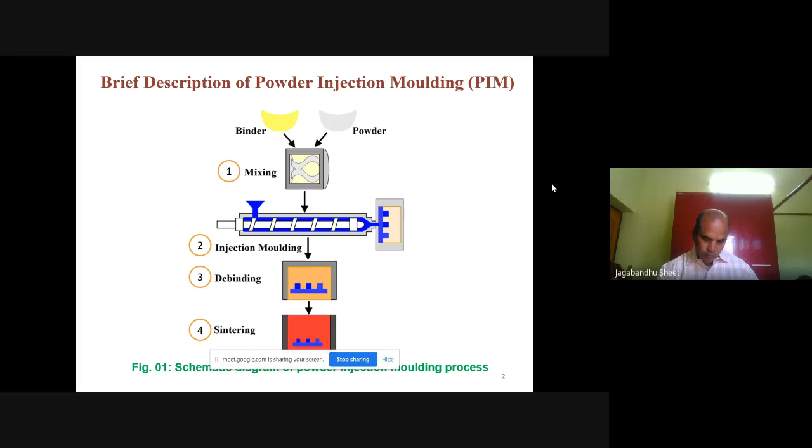For a brief description of powder injection molding, we can see a schematic diagram with 4 stages: first mixing, second injection, third debinding, and fourth sintering. In the mixing stage, powder and binders are mixed together, forming a feedstock, which is fed into an injection molding machine to give it shape. The compact is then sent for debinding, where the binder is removed, and then it goes to sintering, where particles are joined to give strength to the component. Micro powder injection molding is just a miniaturized form of conventional powder injection molding.

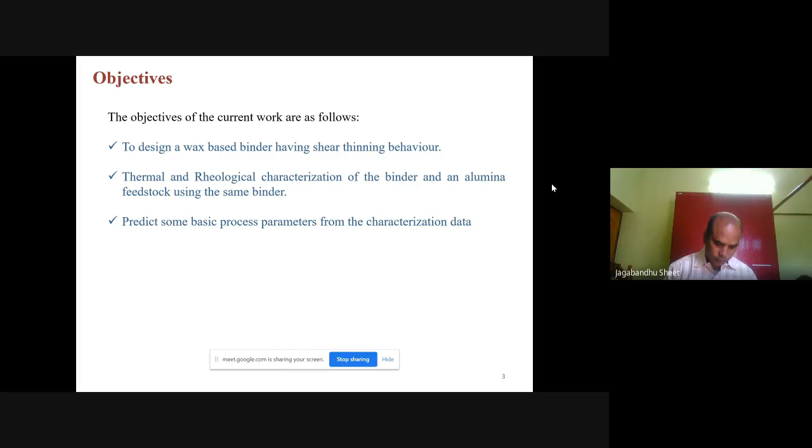The objectives of the current work are as follows: to design a wax-based binder having shear thinning behavior, then thermal and rheological characterization of the binder and an alumina feedstock using the same binder, and to predict some basic process parameters from the characterization data.

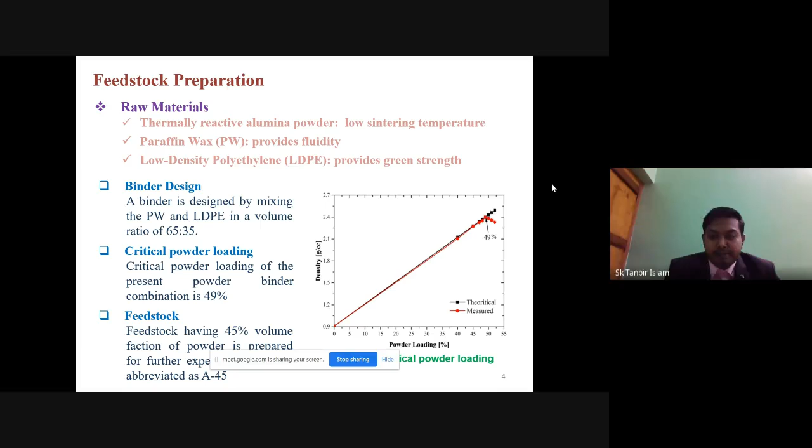TG analysis: here, loss of weight is recorded with increasing temperature, and we found that at 193 degrees centigrade the feedstock starts degrading, and above 478 degrees centigrade there is no further change in weight loss, meaning there are no binders present in that feedstock left to degrade.

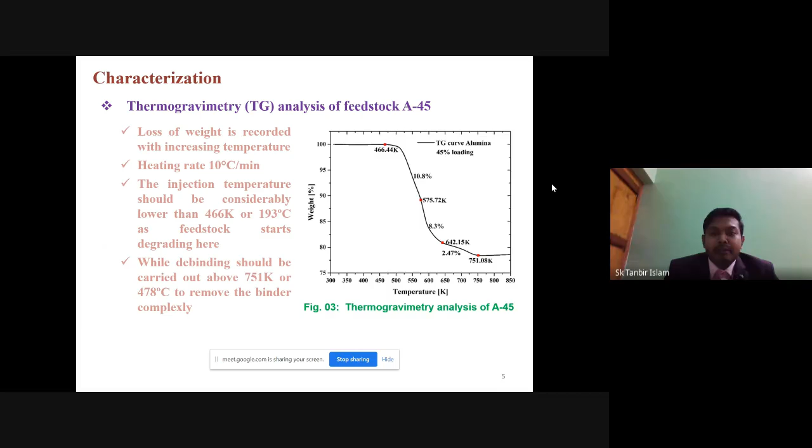DSC analysis: from this we can find the melting and solidification points of the binder and feedstock as well. From this DSC analysis we can calculate the specific heat and latent heat of solidification, as solidification is more important than melting for our binder. Here we have calculated these values.

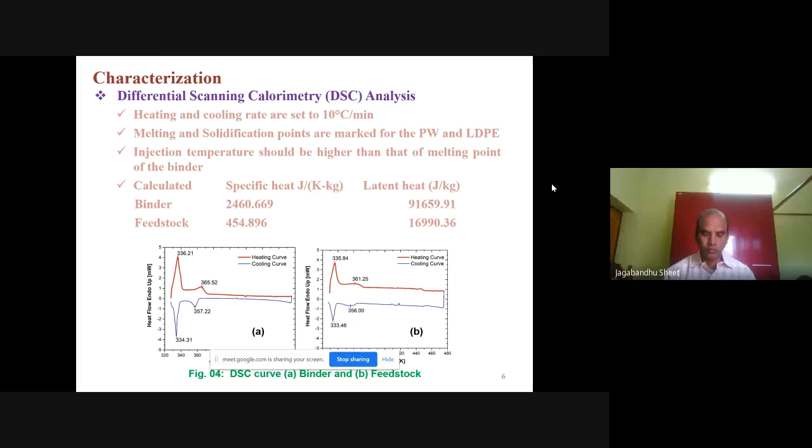Thermal conductivity measurement: in this process we have used the flash light source method to measure the thermal conductivity of the binder over a wide range of temperatures. During our injection, the temperature falls from higher to lower, so we measured it in that way.

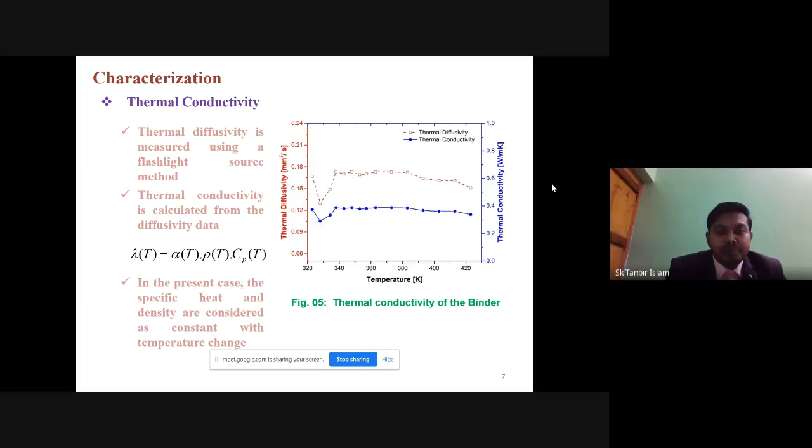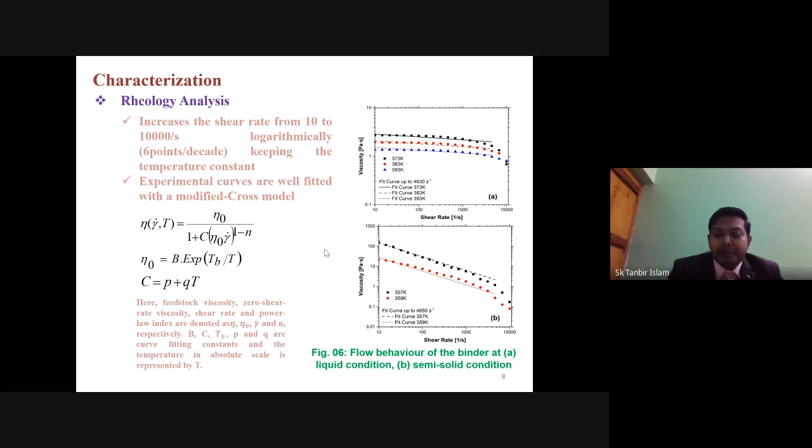Rheology analysis shows us the flow behavior of the material, and here we analyze the flow behavior of the binder as well as the feedstock. Two graphs are presented for the binder at two different temperature levels: the first is at higher temperature where the binder is completely liquid, and the second is at a temperature where one of the binder ingredients starts to solidify. We have used a modified Cross model to fit these graphs, and from these two graphs we can see these show shear thinning behavior - with increasing shear rate, viscosity is dropping.

Similar kind of experiment has been carried out for the feedstock, and we found here also a shear thinning behavior, which is favorable for injection molding process. Using the modified Cross model we used earlier, we found a power law index for liquid binder is 0.91, semi-solid binder is 0.32, and for our feedstock it is 0.43.

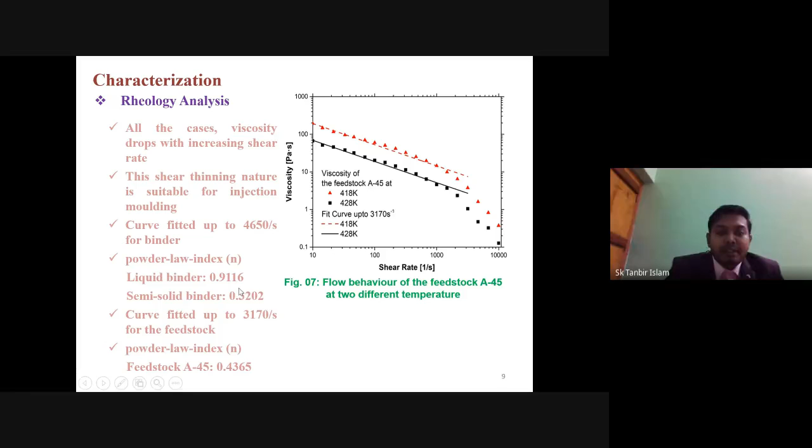It is found that there is a significant difference between liquid binder and solid binder, semi-solid binder, which means that semi-solid binder is highly dependent on shear.

Microchannel out of alumina: we prepared an alumina feedstock and injected it into a die where microchannels are made. We have two samples, one injected and the second one sintered. The component is debound at 500 degrees centigrade and sintered at 1540 degrees centigrade for 30 minutes, and we achieved 97% density of the alumina.

This component could be used for cooling purpose in small devices.

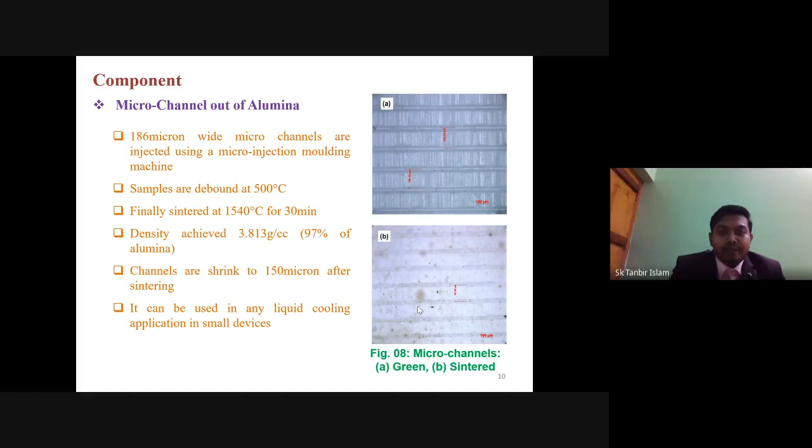Conclusion of our work: TG and DSC analysis suggested that the injection temperature should be between 92 degrees centigrade and 193 degrees centigrade, and the wax-based binder system provides shear thinning behavior to the feedstock. A modified cross model fits the rheology data. Data like latent heat and specific heat obtained from DSC analysis, and flow behavior of the binder and feedstock, could be used to simulate the injection stage in future work.

The applicability of the feedstock A-45 in micro powder injection molding is experimentally validated by developing microchannels through injection molding and subsequent debinding and sintering.

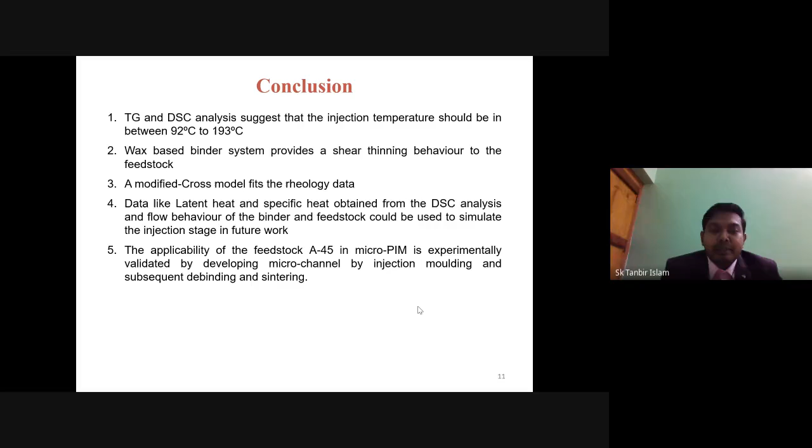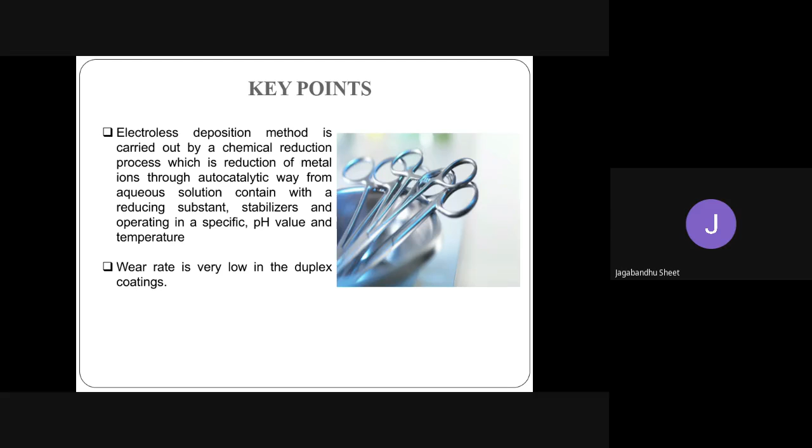The electroless deposition method is carried out by a chemical reduction process, which is reduction of metal ions through autocatalytic reaction from aqueous solutions containing the reducing substance and stabilizers, and the pH value and temperature have to be maintained according to the coating deposition time. And the electroless deposition coating, like the duplex coating, has a very low wear rate here.

The electroless deposition method has become more popular for industrial applications due to excellent tribological, electrical, mechanical and physical properties. And this is applied in the whole range of industry, or in daily use equipment; in a very simple example, in our almirah it is also used. Producing homogeneous coating with electroless deposition is possible, and it also exhibits high quality adhesion on different substrate materials. The electroless process allows producing very uniform homogeneous coatings.

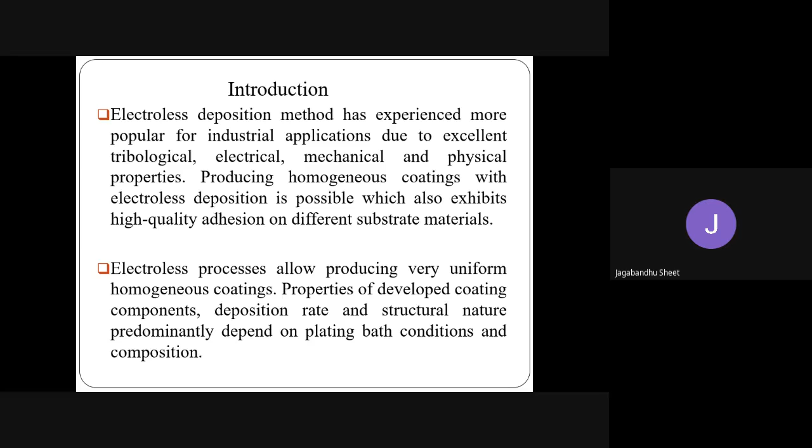The properties of developed coating components, deposition rate and structural nature predominantly depend on plating bath conditions and compositions also. And to increase the corrosion resistance, alloying elements like zinc, molybdenum, copper, etc. are added to the electroless NiP and NiB coating. That is, different types of nickel phosphorus as well as nickel boron coatings can include this type of components. And a few researchers are not fully convinced with the progress of corrosion resistance of the deposition coatings here.

For this, considerable attention has been paid to duplex coating, that is Ni-P as the inner layer and Ni-B as the outer layer coating, as well as multi-layer coating deposition. That means not just duplex coating: more than two layers of coatings can be created, like multi-layer coating deposition, which includes all types of mechanical and tribological property improvements.

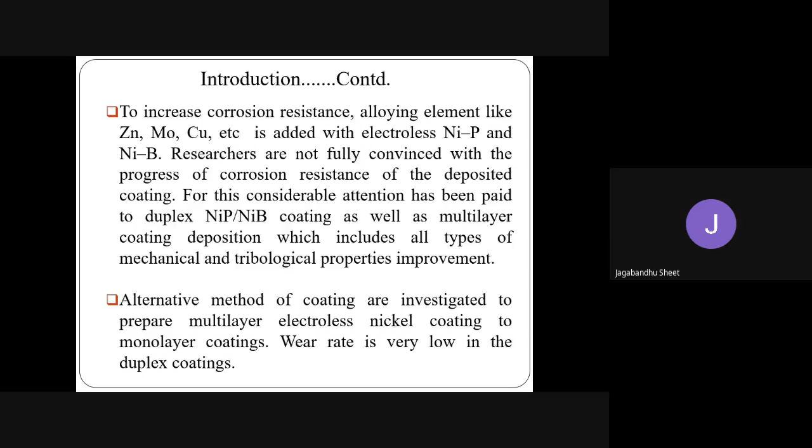Here, alternative methods of coating are investigated to prepare multi-layer electroless nickel coatings compared to monolayer coatings. The wear rate is very low in the duplex coating. The objective of the present work involves the preparation of duplex Ni-B/Ni-P, that is Ni-B as the inner layer and Ni-P as the outer layer. Both processes are done during this investigation, with Ni-B as the inner layer and Ni-P as the outer layer in the duplex coatings.

Another thing is the multi-layer coatings of Ni-B and Ni-P, that is four successive layers, done during the coating deposition process, with Ni-B as an inner layer and Ni-P as an outer layer, coated using dual bath techniques. These are also evaluated for tribological properties like wear resistance and coefficient of friction, and mechanical properties like micro hardness are measured.

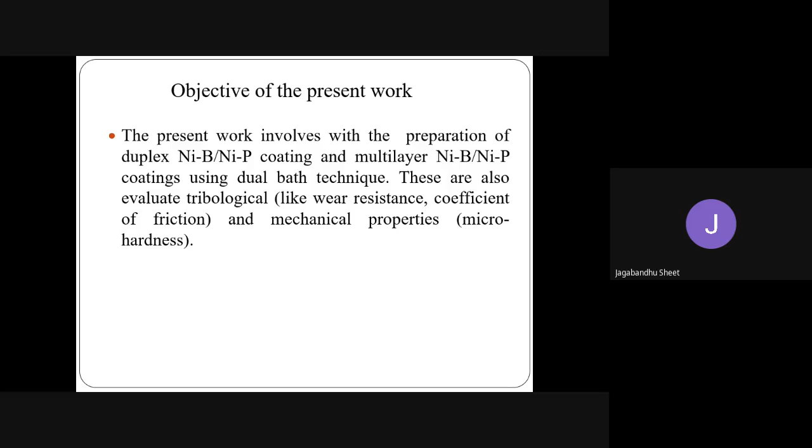First we prepare the samples by grinding them several times. We first clean the rust from these samples, and they are dipped for 1 minute in a 50% hydrochloric acid solution. After completion of the sample preparation, they are submerged in the previously prepared nickel-boron bath solution. The nickel-boron bath is prepared with different components: nickel chloride, sodium borohydride, ethylene diamine, lead nitrate, and sodium hydroxide.

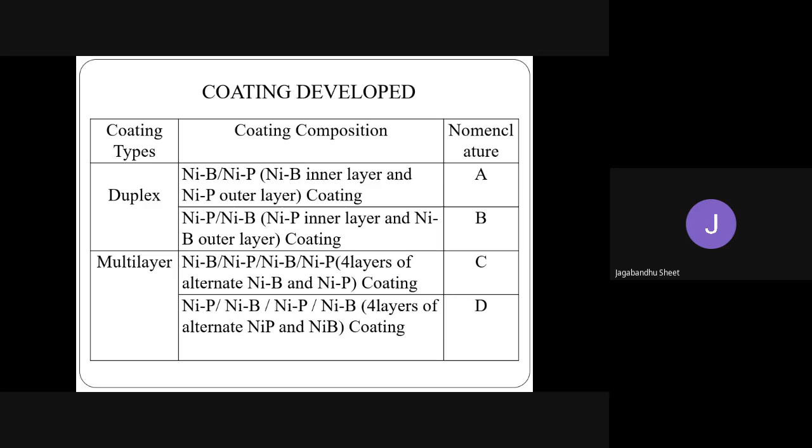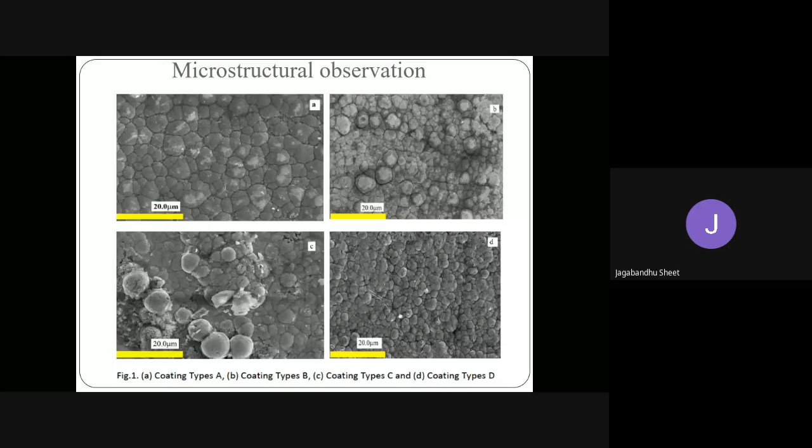These are the different microstructural views of coating types A, B, C and D. With NiB as the outer layer, in coating B, we can see a cauliflower type of phase. These are the different hardness values measured. For the multilayer coating D, where NiB is the outer layer, a very high hardness value is found, above 1000.

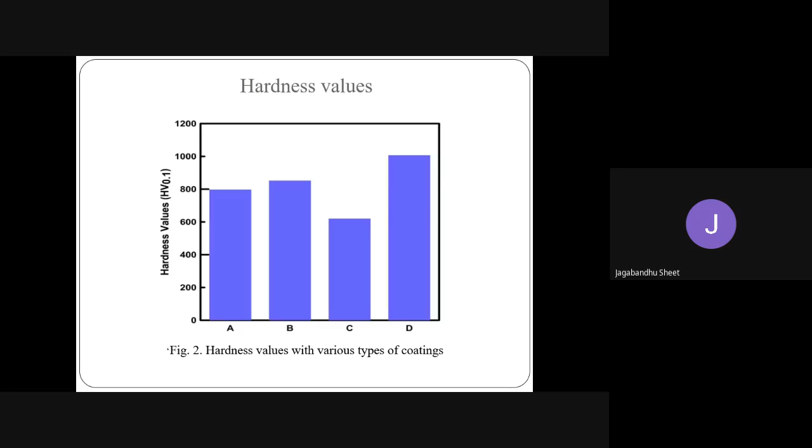NiB is a very hard phase. Comparing A and B, coating A with NiP as the outer layer has lower hardness than B with NiB as the outer layer. Coating C, the multilayer with NiP as the outer layer and four successive layers, has very low hardness. But the multilayer coating with NiB as the outer layer and four successive layers has the higher hardness value.

Next, the friction performance is discussed. The coefficient of friction is very high for the duplex coating with NiP as the outer layer. Comparing duplex coatings A and B, with NiB as the outer layer the coefficient of friction is lower. For the four-layer multilayer coatings, NiP as the outer layer gives more friction, while NiB as the outer layer gives very low friction.

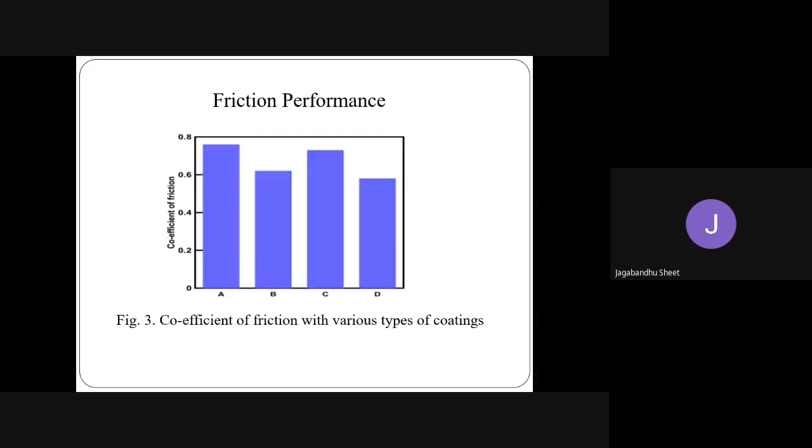Considering the wear behavior of the four coating types, the multilayer coating with NiB as the outer layer has a very low wear rate, while the wear rate is high for the duplex coating with NiB as the inner layer and NiP as the outer layer. The wear rate reduces compared to the duplex coating with NiP as the outer layer.

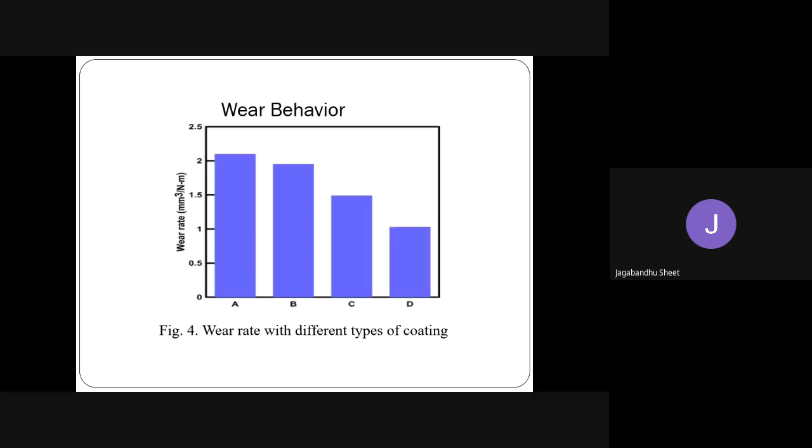And also, for the multi-layer coatings, comparing C and D, we can see that when NiP is the outer layer, the wear is high, and when NiB is the outer layer, the wear rate is very low. And these are a few conclusions.

From the present work, the following analysis led to the following conclusions. The present study reveals that it is possible to prepare electroless duplex NiP/NiB, that is NiB as the outer layer, and multi-layer NiP and NiB coatings by sequentially dipping into the two previously prepared coating baths. For NiP, a high phosphorus content is taken, that is Ni-high P.

The solution may decompose minorly due to fluctuation of temperature. It is very difficult to keep this bath stable. Suppose the temperature fluctuates, then the bath composition decomposes at that time. The NiB bath is much more stable, without bath decomposition for a period of 2 hours.

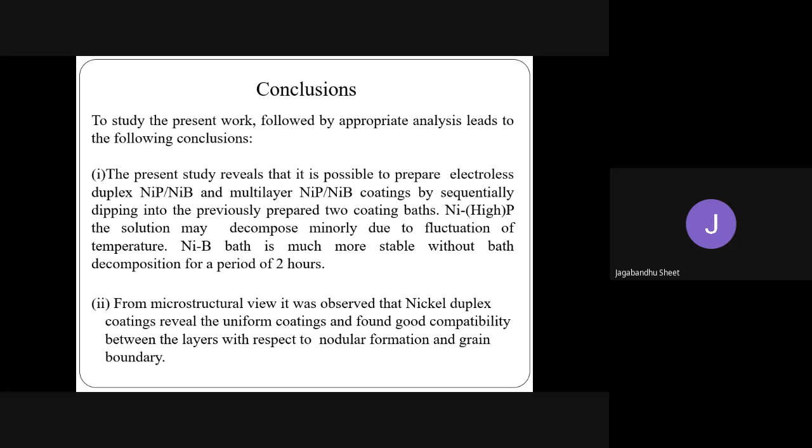Second, from the microstructural view, it was observed that nickel duplex coatings reveal uniform coatings and good compatibility between the layers with respect to nodular formations and grain boundaries. Also, the highest wear resistance is achieved in coating D compared to all types of coating depositions. Comparing the two types of multi-layer coatings, the highest wear resistance was observed for NiB as the outer layer, and lower wear resistance for NiP as the outer layer.

For the duplex coating, the NiP wear resistance is lower than the duplex coating NiP/NiB, that is with NiB as the outer layer. The hardness of coating C is the lowest of all types of coatings. It is a multi-layer coating, but the outer surface is nickel phosphorus, so its hardness is the lowest of all types of coating.

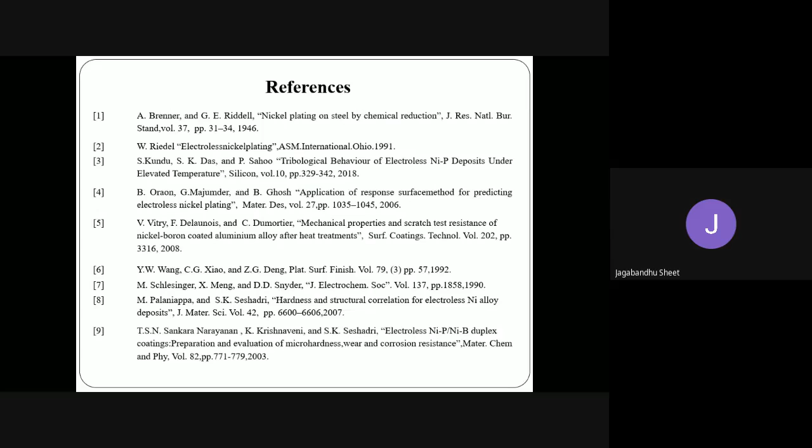It also reveals that hardness values are lower for coating A, and the highest hardness values were found for multilayer NiB depositions. The multilayer coating D is the most effective coating among all types in terms of hardness and wear resistance. And these are the references used to prepare these experiments.

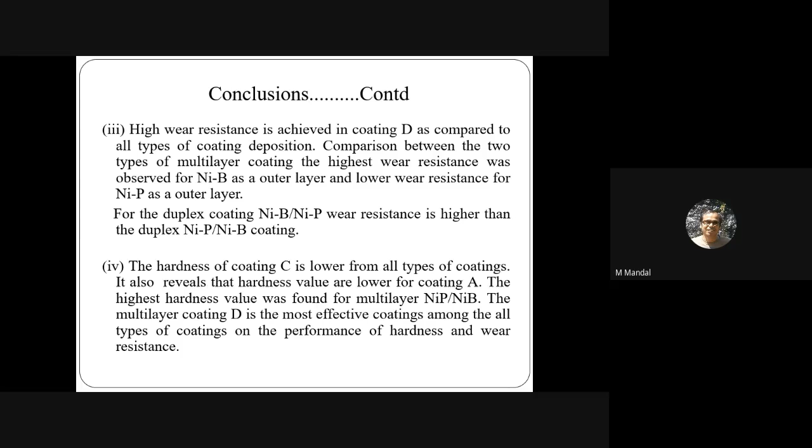Any more questions? Okay, Polas, I have a question. Mr. Polas, what are the further studies of this project in future? Actually, I want to continue with XRD and a few analyses for characterization purposes, and also the cross cut and mapping; all these further studies will be done during this project.

And apart from this, would you like to conduct any design of experiment, like factorial or Taguchi or other methods? No, sir. Presently there is no intention about that. Taguchi is used for modeling purposes, and this is totally experimental based. It is not decided yet; my guide will decide. Then I will also consider the Taguchi model and other models.

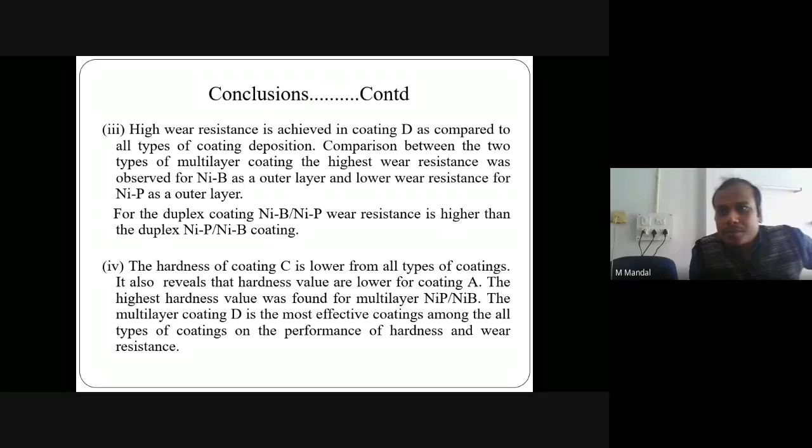Polas, under whom are you doing your research work? Who is your guide? Sir, my guide is Dr. Suman Kalyan Das, and co-guide is Dr. Prasanta Sahoo. Okay, very good.

Okay, now you can continue this work. But my perception is that if you go for validation, it will be better for you, and if any paper is communicated, it will be very helpful.

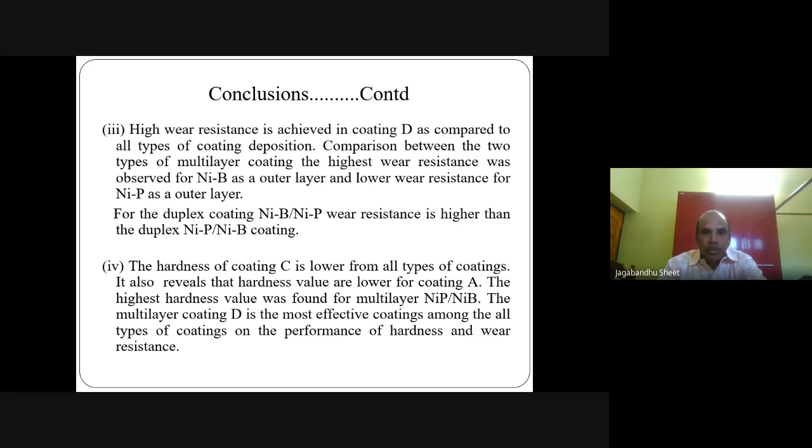So the title of the paper for the next presenter is numerical simulation and study of the effects of machining parameters under dry turning condition. The paper ID is MM1574. Mr. Dipanjan Dey from the Department of Mechanical Engineering, Jalpaiguri Government Engineering College, would be making this presentation under this topic. Okay, so I am requesting Mr. Dipanjan Dey to continue your presentation.

Okay. Yes, sir. Starting within a minute. Sir, is my screen visible, sir? No, not visible. Before that, Mr. Polas Biswas, you may mute yourself. Polas. Okay, now it is visible, clearly visible. Okay, sir. Okay, you can proceed.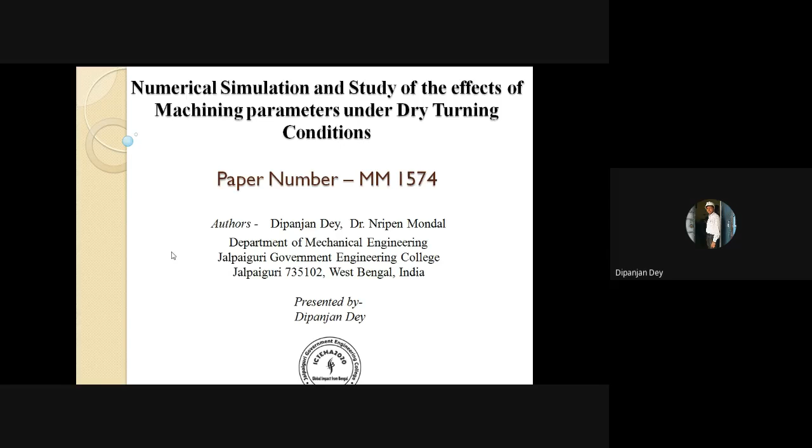In industrial practice, the common goal involved in almost all the machining processes is to reduce the power consumption and cutting temperature while the machining operation takes place. Simulation and finite element analysis models to study the turning process are an effective way to analyze the effects of the machining parameters. So my statement of the problem is the turning operation, as I have said already, it is one of the most basic machining operations. So the tool life, tool wear rate, cutting temperature, and power consumption by the machine are the major factors which are looked upon in order to increase the efficiency of the machining process.

Conventionally, the route we are taking is we use minimum quantity lubrication, liquid carbon dioxide, flood cooling, etc. That is, we are moderating basically the cutting fluid so as to reduce the cutting temperature. But due to various reasons such as environmental degradation, the cost and affordability of such materials, and also we are unable to reuse it again and again, dry condition is mostly preferred.

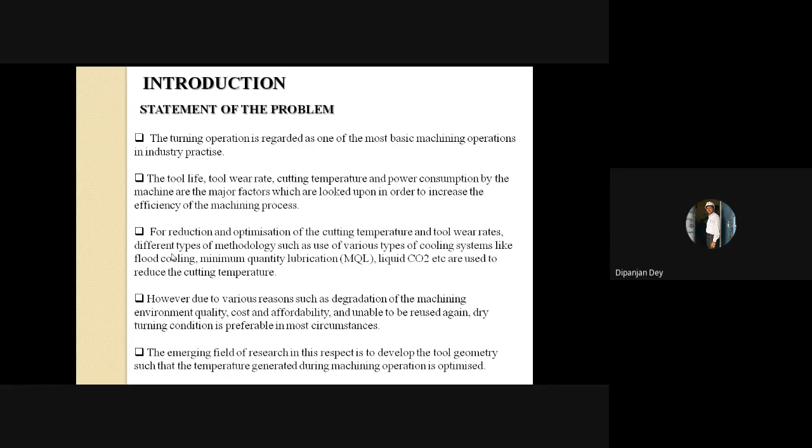It has been seen that under dry condition, a very minimum amount of cost and also a very minimum amount of environmental degradation is caused. But dry turning also has its disadvantages, because it is not very effective in reducing the cutting temperature. So the emerging field of research in this respect is to develop the tool geometry so that the temperature generated during the machining operation is optimized.

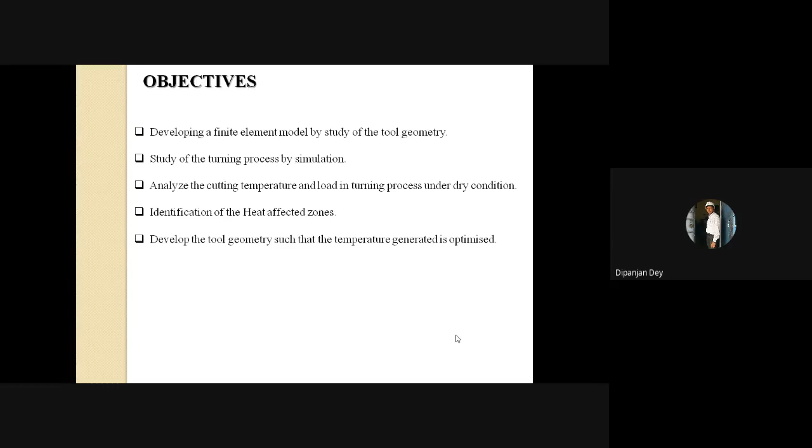So the objective of our study is to develop a finite element model by study of the tool geometry first of all, study of the turning process by simulation, whether such a study is feasible or not. That is, we are actually studying the feasibility of simulating such a model. Identification of the heat affected zones. If we identify the heat affected zones, then we can develop the tool geometry accordingly so that the temperature can be optimized. And also the cutting temperature and load in turning process, we have tried to analyze that.

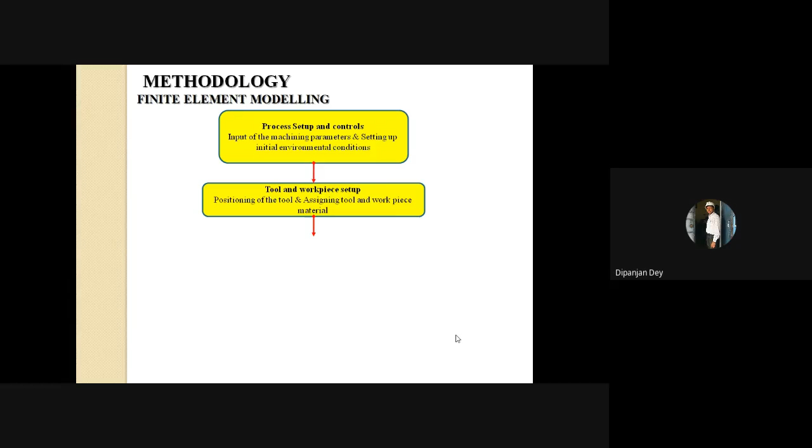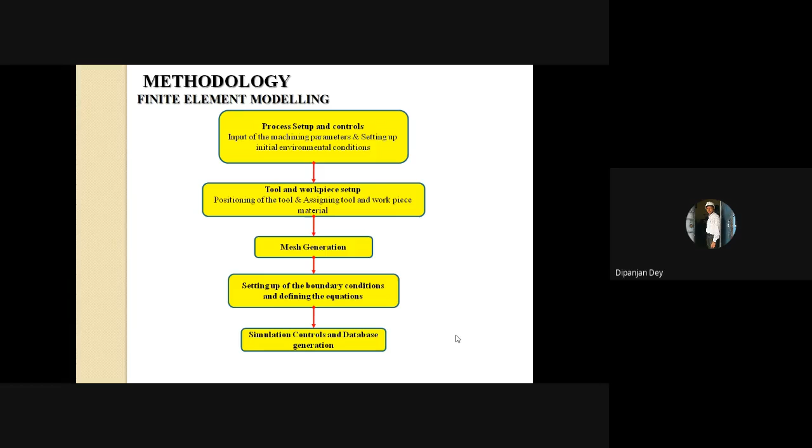Methodology in this study is the process setup and controls, that is the input of the machining parameters and setting up of the initial environmental conditions, followed by the tool and workpiece setup, that is positioning of the tool and assigning tool and workpiece material. The material that has been used is tungsten carbide for the tool material, and for the workpiece material we have used AISI 1013. Then we go on to the mesh generation, followed by setting up of the boundary conditions and defining the equations. Then simulation controls and database generation, followed by the post-processing part, which is results and data interpretation.

For the workpiece part, we have taken a significant part of the tool and the workpiece, and we have tried to generate the mesh accordingly. The tool material is tungsten carbide, workpiece material is AISI 1013, and the number of elements for tool mesh generation is 65000. This has been found after many trials to be very accurate and gives fairly good results.

There are two models used in simulating this type of behavior: one is the Archard model and the other is the Usui model. We have used the Usui model because there are significantly fewer calibrated constants that are experimentally calibrated, so this equation is particularly useful.

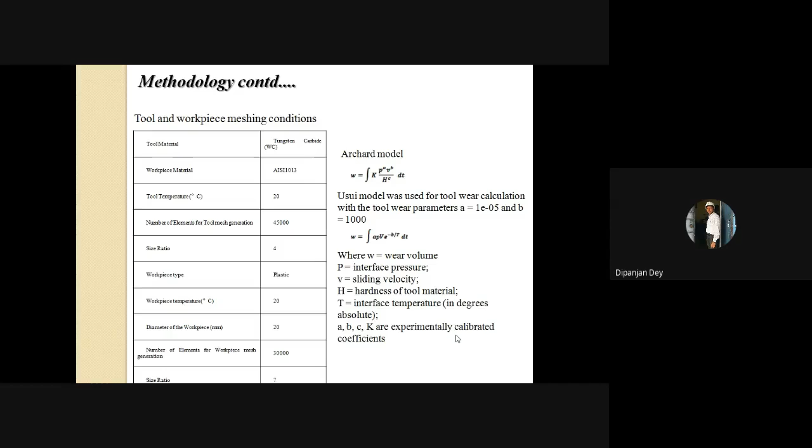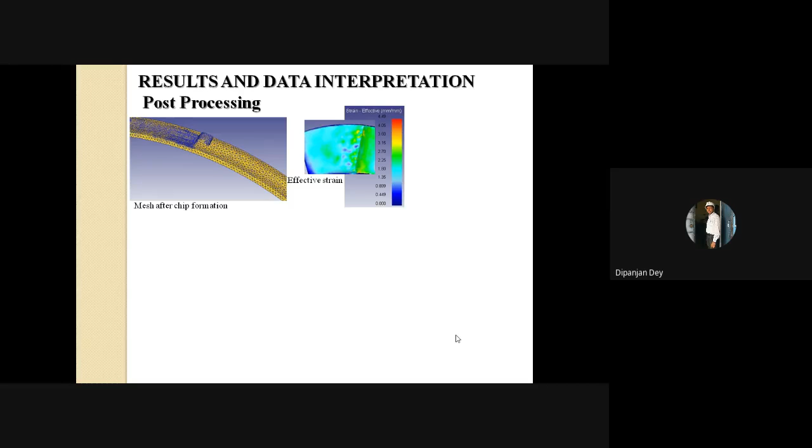For the post-processing part, this is the mesh after chip formation, and this is the effective strain. As you can see, these are the regions that have developed more strain, and this is the stress regions.

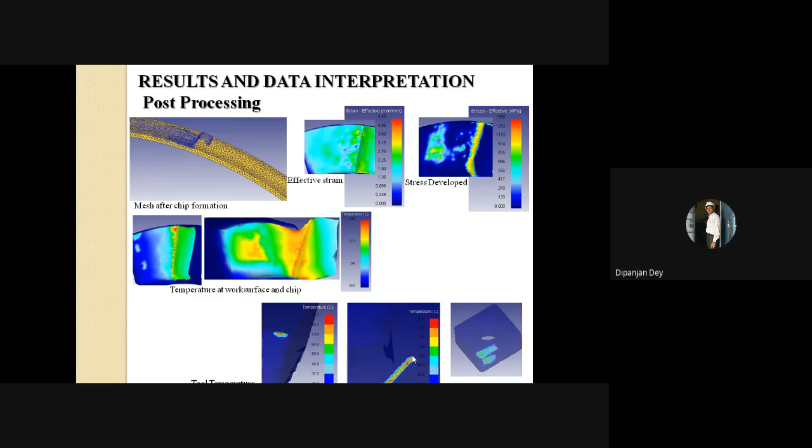Temperature at work surface and chip. There you can clearly see the temperature variance as the chip cutting goes on. And this is the tool. Here you can clearly see in this part that the temperature starts to rise, then in the rake surface the temperature proceeds, and here also the same thing goes on.

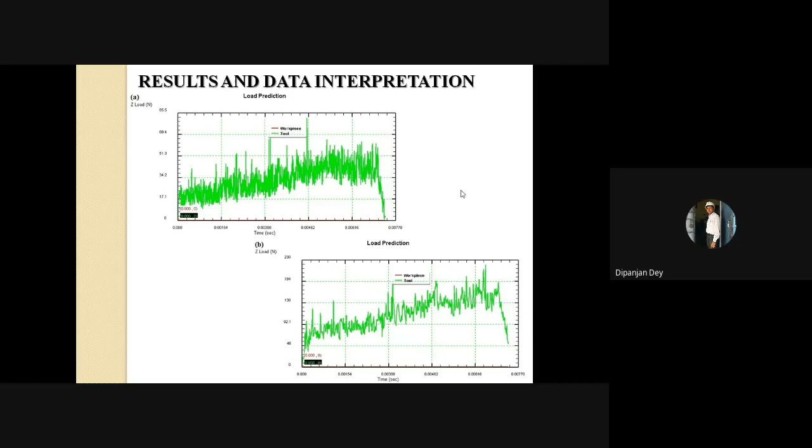This is the load prediction curve for different values of depth of cut. Here we have tried to vary the depth of cut. The first one is for 0.12 millimeter, and the second one is for 0.3 millimeter.

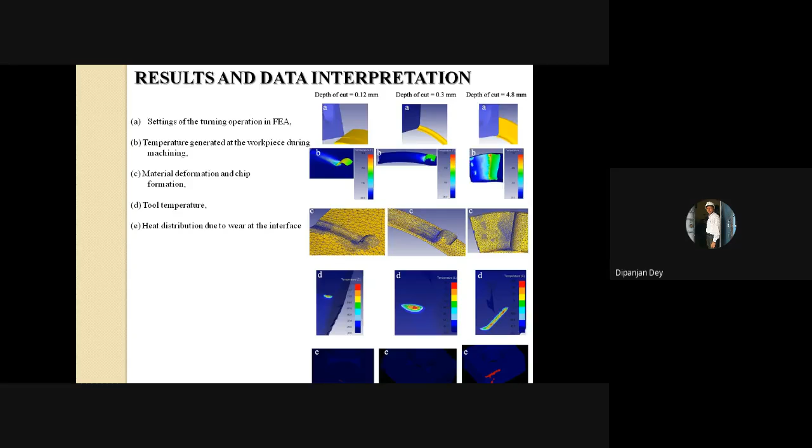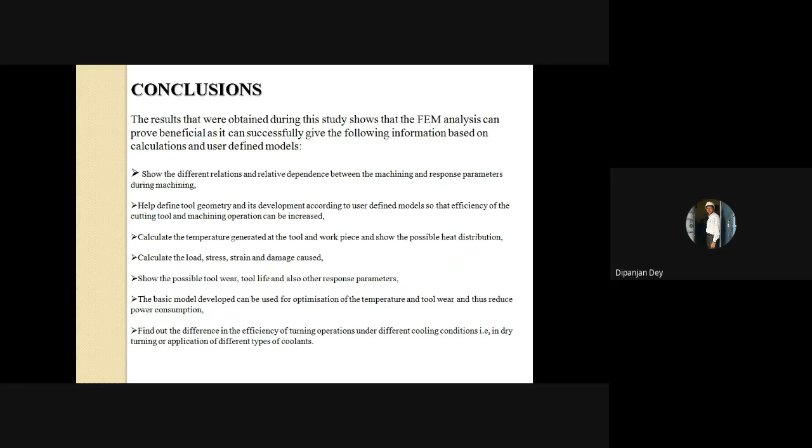The basic model developed can be used for optimization of the temperature and tool wear, and thus reduce the power consumption. Also, to find out the difference in the efficiency of turning operations under different cooling conditions, that is in dry turning and application of different types of coolants.

Here we can also vary the environmental conditions and the type of coolant used. For dry condition, we have naturally given the cooling coefficients, the heat convection coefficients of air only. So basically it relates to dry turning, but we can also vary that.

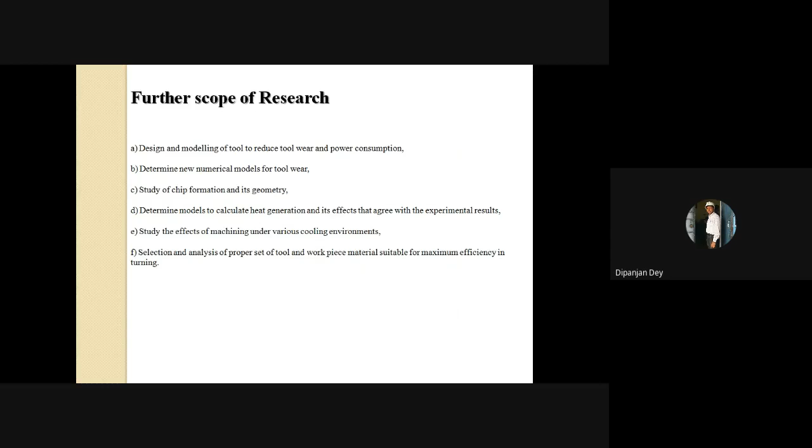Going on to the further scope of research, there is further scope in designing and modeling of the tool to reduce tool wear and power consumption, study of chip formation and its geometry, to determine new models for tool wear, to determine models to calculate heat generation and its effects that agree with experimental results, study the effects of machining under various cooling environments, and also selection and analysis of proper tool and workpiece setup suitable for maximum efficiency in turning.

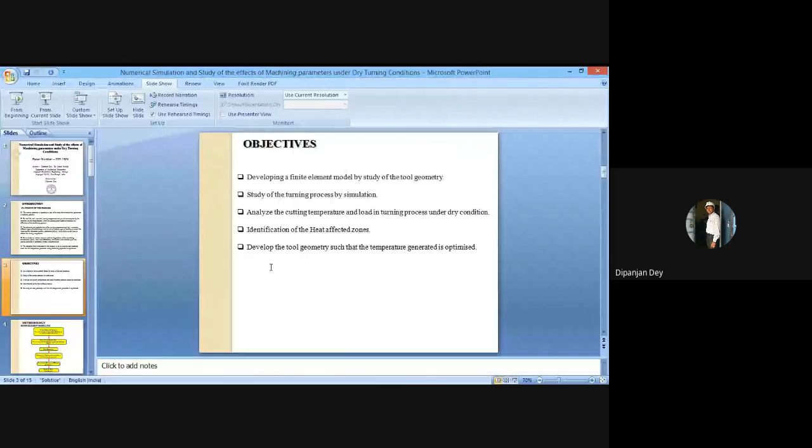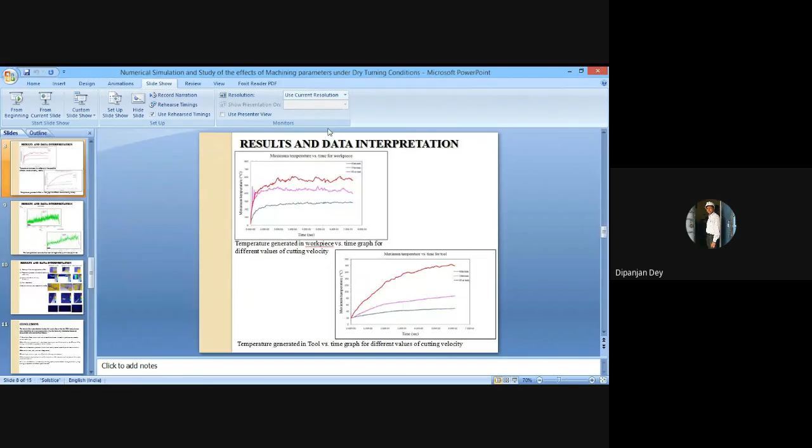Here you can see the maximum temperature that has been reached in these regions. The maximum temperature is fairly about 600 for the workpiece, and about 160-180 for the tool.

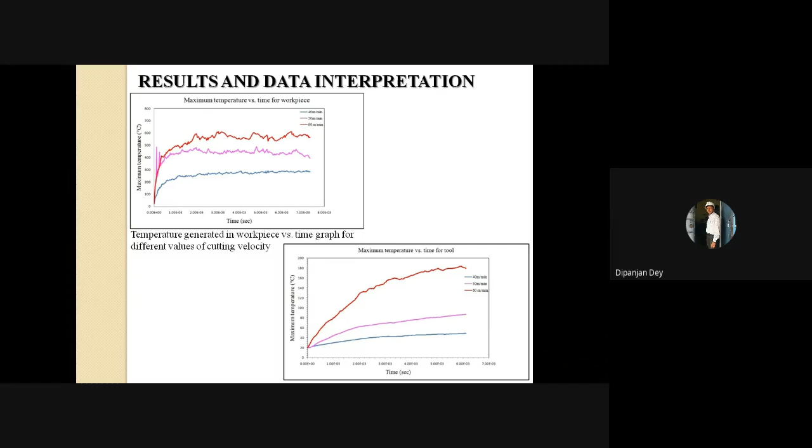Is there any question from the audience? Probably there is no question. Okay Dipanjan, I am asking one question.

Regarding your study, is this only numerical work, or is there experimental work as well? Actually sir, we have not conducted any experiments so far, but we have validated our numerical results with different types of data that has already been done. We are planning to further develop it.

How have you gotten the data, without doing experiments? Actually sir, we have done this using response surface methodology. We have taken a range of input parameters. But before giving the input parameters, you have to collect data, either with the help of experiments or from somewhere else, to do the analysis. Yes sir, we have verified with different published authors' experimental results, and found that it fairly matches.

So you are taking the experimental data from renowned papers. Yes sir. And for the numerical analysis, FEM analysis, which software package did you use? This platform is known as Deform 3D, and for tool geometry development we have used SolidWorks. Okay, very good. Thank you sir.

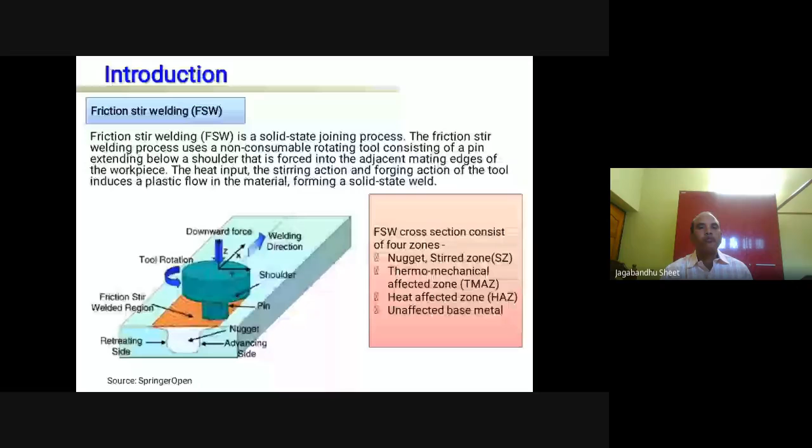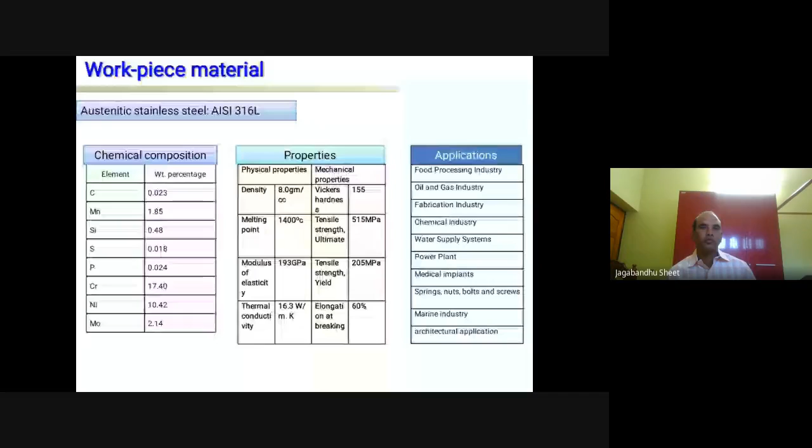The workpiece material we have used is AISI 316L pipe. The L indicates low carbon steel, with only 0.023% carbon, so it's very low carbon, and the chromium percentage is very high at 17.40%, making it a corrosion resistant steel. This grade is also called marine grade steel because of its corrosive resistance properties. These are the mechanical and physical properties of 316L pipe, I won't go into detail on them.

These are some applications of 316L pipe: food processing industries, oil and gas industries, chemical industries, power plant industries, and marine industries, since this grade of steel is also marine grade steel.

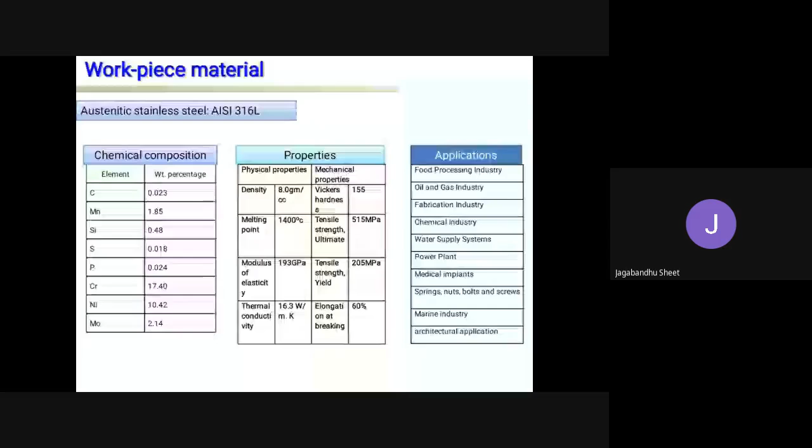This is the tool we used for joining the 316L pipe: a PCBN, polycrystalline cubic boron nitride, coated tool with a tungsten-rhenium shank, and the tool pin has a right hand thread.

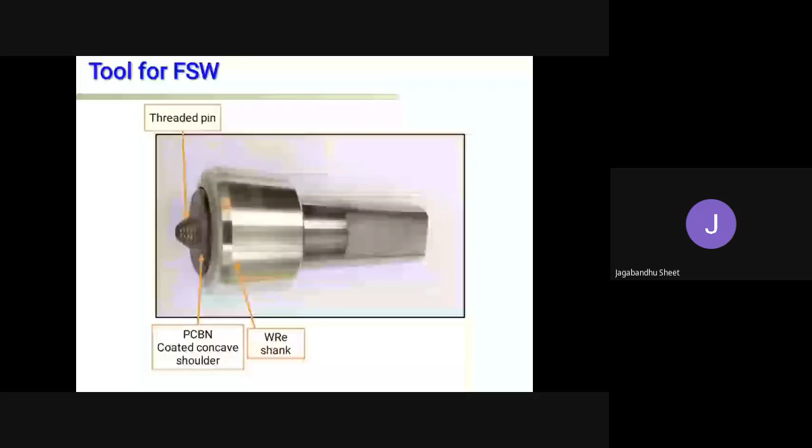The welding was done with a PCBN coated tool. The experiment is conducted in position control mode at constant depth, which was kept constant at 6 millimeters.

When the welding started, the tool position was 3 millimeters above the top surface of the pipe. The total traveling distance during engagement is 3 millimeters in air and 6 millimeters in the material, with 1 second dwell time for extraction. The total traveling distance is 9 millimeters, at a feed rate of 50 millimeters per minute.

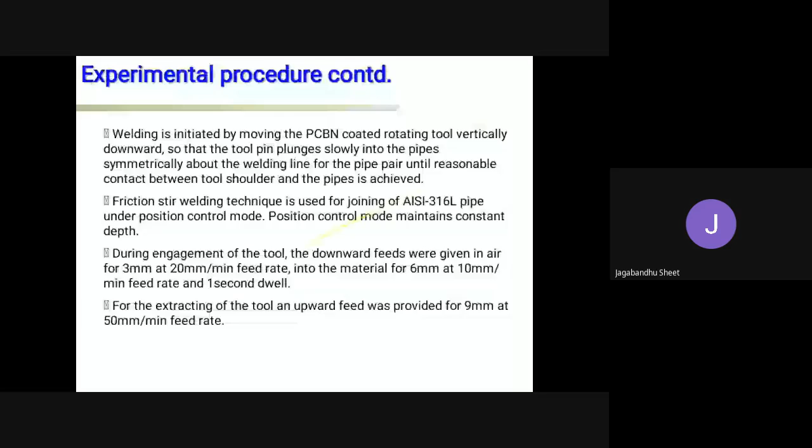You can see it become red hot due to the friction heat.

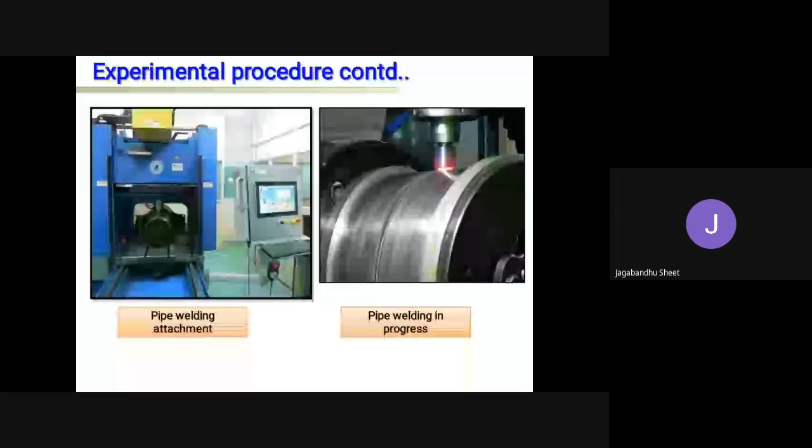This is the process parameters involved in friction stir welding. We have worked on the first three process parameters: tool rotational speed, tool traveling speed, and plunge depth.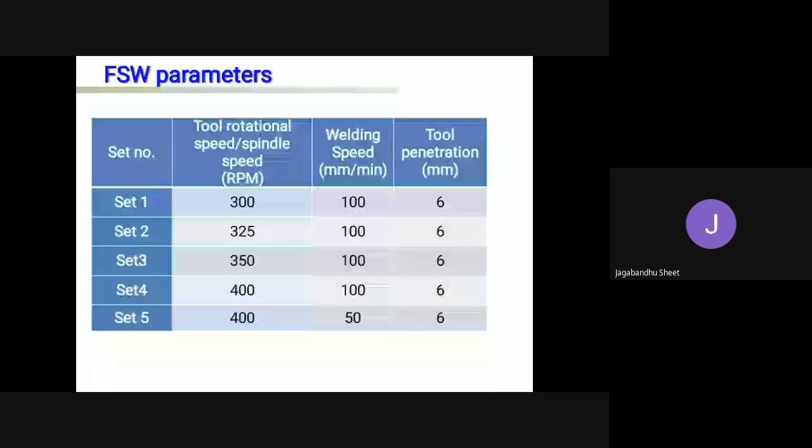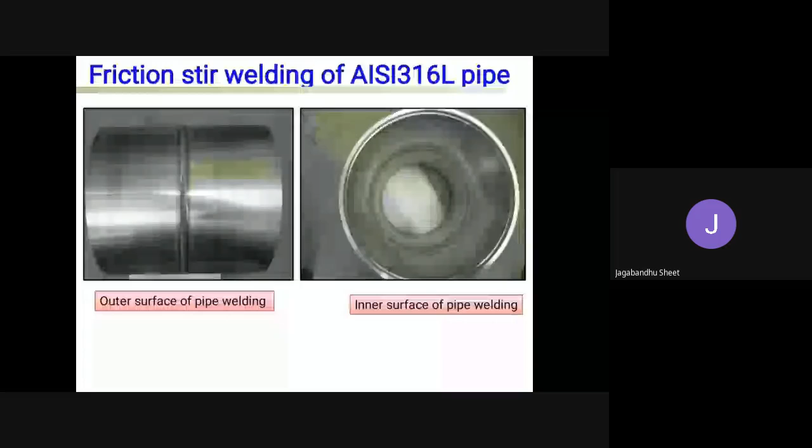This is the picture of the pipe welding outer surface and inner surface. We can see there are no visible defects in either the inner or outer surface. Now for the results and discussion.

This is the force analysis for the first set of process parameters. Here you can see three different zones: engagement zone, welding zone, and extracting zone.

For the combination of 300 rpm spindle speed and 100 millimeters per minute welding speed, the Z force reached 22.46 kilonewton at the start of the welding zone and 22.75 kilonewton at the end. The X force varied from minus 0.5 kilonewton to minus 6.69 kilonewton, and the Y force varied from minus 2 to minus 5.96 kilonewton at the start and end of the welding zone.

In this parameter condition, there were no visible defects shown, so good quality surface has been achieved in this friction stir welding process.

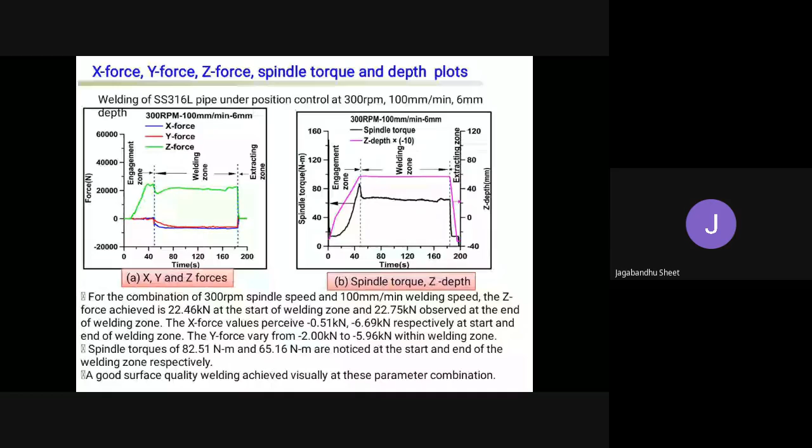This is the second set of process parameters. Here the spindle torque varies from 127.2 newton meter to 84.96 newton meter, and the Y force varies from minus 0.99 kilonewton to minus 2.34 kilonewton. In this set of process parameters, there was no visible defect shown.

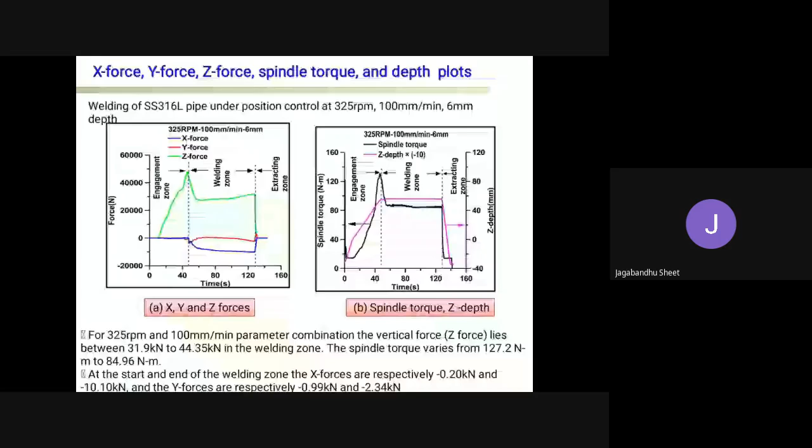This is the third set of process parameters, where the vertical force, or Z force, reached 43.5 kilonewton at the start of the welding zone.

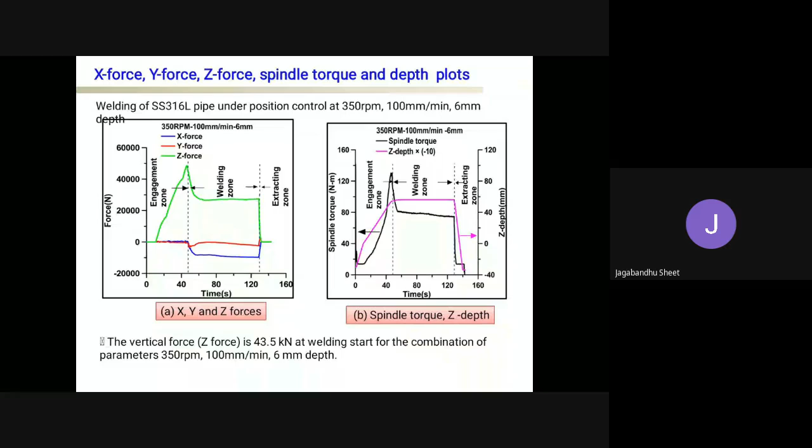This is the fourth set of process parameters. The vertical force reached 43.5 kilonewton at the start of the welding zone. For both the third and fourth sets of process parameters, the X, Y, and Z forces and spindle torque show a similar trend.

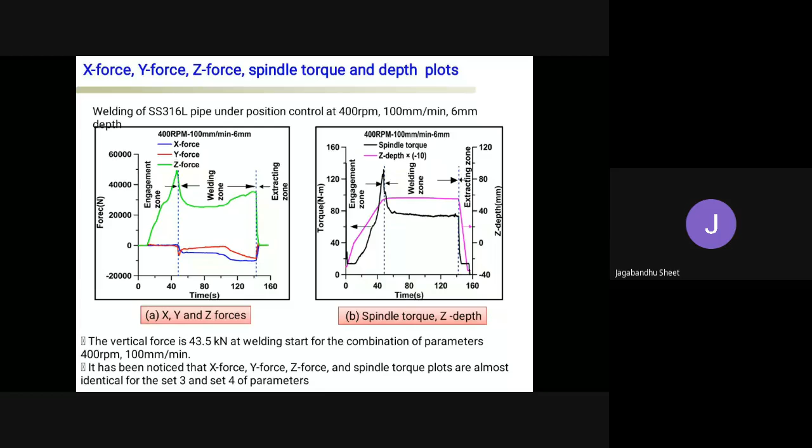This is the fifth set of process parameters: 400 rpm, 50 millimeters per minute, and 6 millimeter depth. In this set, the vertical force was recorded at 36.9 kilonewton at the start of the welding zone, and there was also no defect shown.

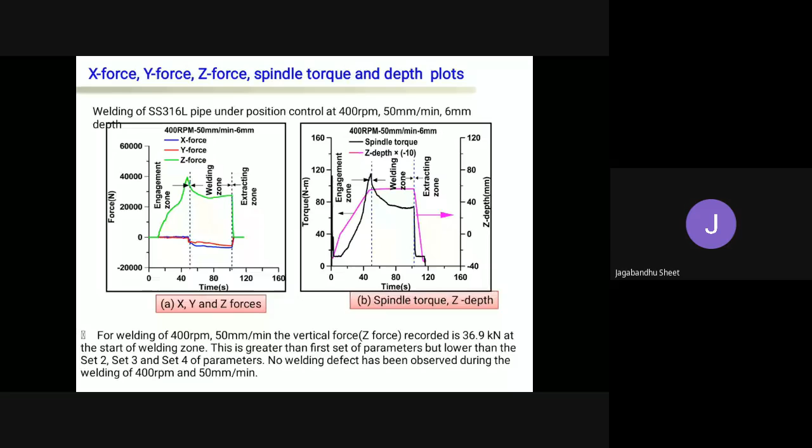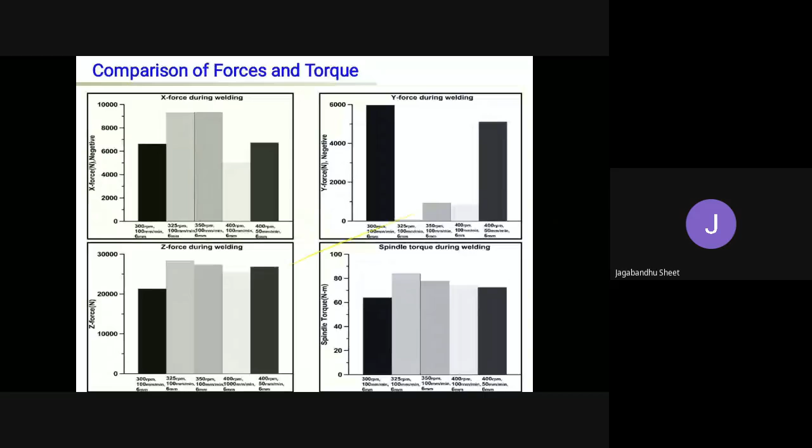So this already I have described. So this is the conclusion: the variation of the tool force and the spindle torque with welding parameters during friction stir welding of 316L under position control mode has been investigated. And the force and torque recorded in different parameters show similar trends in different zones, that is the tool engagement zone, welding zone, and the extraction zone.

So the steady value of the axial force in the welding zone is observed from 21.3 kilonewton to 29 kilonewton, and the spindle torque varies from 64 newton meter to 84 newton meter.